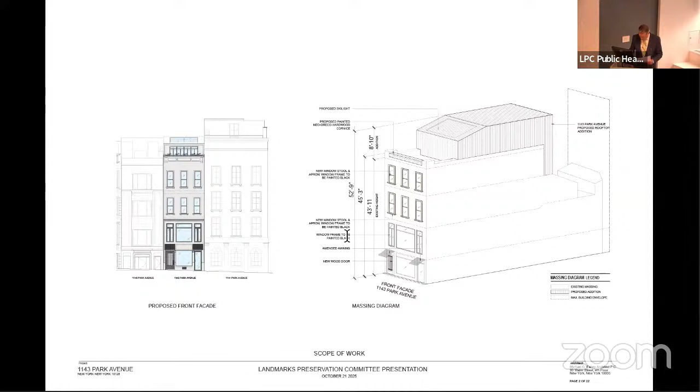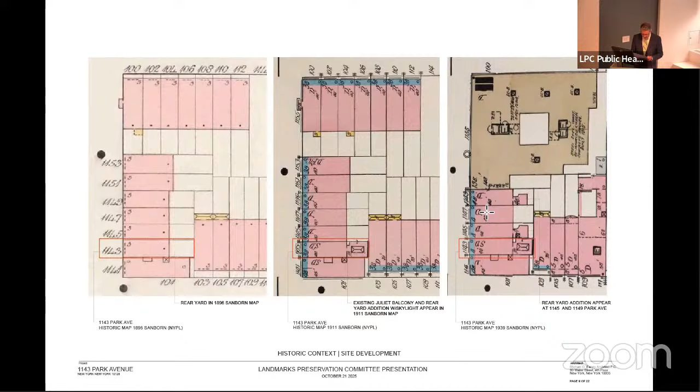In the center, the 1911 map shows that 1143 added a 2-story rear yard addition, occupying the total lot. In the 1939 Sanborn map, you can see that 1145 and 1149 both added 4-story additions onto the rear of their respective properties.

I'd like to talk a bit about the design of the project.

The addition and expansion of 1143 Park Avenue is a 517 square foot by 10-foot high rooftop addition. The addition is set back 16 feet off the front facade to decrease the visibility from Park Avenue in response to the comments from the Community Board 8 meeting.

The addition also has a shed roof with a skylight within the first 11 feet to decrease the exposure of the addition to Park Avenue.

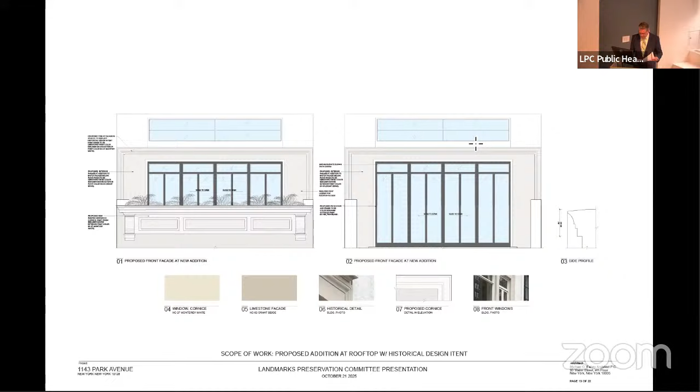In this slide, on the front elevation, we believe that the proposed design is aligned with the classical style shown in the original row houses, as well as you can see the new vertical extension here does not exceed the neighboring extensions in height.

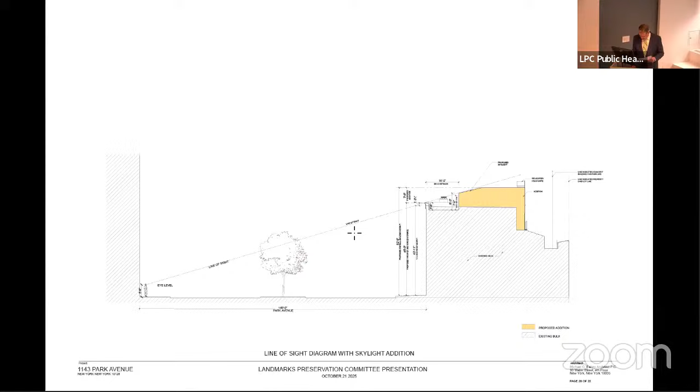Thank you for your time, and if there are any questions that anybody may have.

Thank you. Commissioners, does anybody have any questions? Commissioner Jefferson? Was the wood balcony original to the building?

No, it was not original. We believe it was added in 2004. Thank you. Any other questions?

Okay, so this item was read into the public hearing, public records. So we didn't have the opportunity to take testimony. So I'm going to note that there's nobody here that would like to testify.

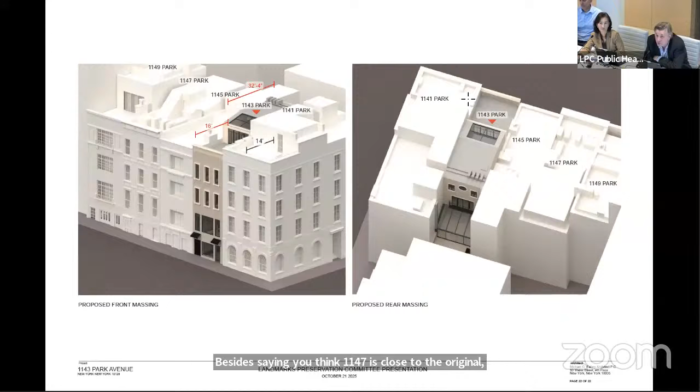Besides saying you think 1147 is close to the original, do you have any documentation of what the original building looked like? The only documentation we have is the pictures from the 1929 photo, as well as some documentation literature that I believe is on the Carnegie Hill Historic District website, saying that 1147 is the closest to the original design. Other than that, there's no other documentation that I have.

And this photo doesn't tell us what 1143 looked like. It just may be more accurate of 1147. Well, the 1143 - since there were 4 row houses, I suspect that Sullivan developed them all in the same style. And then 30 years later, Roth came around and he did 1149, he changed that facade, 1145, and then in 1924, 1143.

Thank you. Thank you so much. Okay, let's go ahead and close the proceedings. Commissioner Goldblum, would you make a motion to close the proceedings? So moved. Commissioner Jefferson, would you second that? So second. Okay, all in favor, say aye. Aye. Any opposed? Okay, the proceedings are closed.

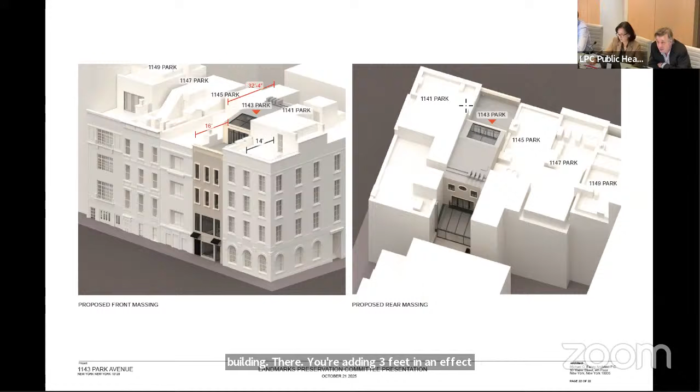So I think we should look at pulling that addition back 3 feet. You could potentially on the floor below add a 3-foot addition because we often accept that. I would also say that I think that round window is totally out of place.

And that rear facade can be worked on, but that is similar. So, in general, I think the rooftop addition from the front is fine with the added cornice, but I would leave the rest of the front as is. And I would reduce the rear addition, at least for the top floor, to keep the existing facade exposed. But again, we'll look forward to hearing what my fellow commissioners say.

And the other thing I'd add is I realize you made modifications after the community board, but it's hard for us to understand those modifications since I would have liked to have seen an appendix with the original drawings so I could understand what you did in response to what the community board said, because here you described it, which I appreciate, but it would be good to have it documented.

Thank you. Just wanted to note one thing before we continue the discussion. The property at 1149 Park Avenue, which is labeled on the diagrams here, the commission did recently approve a full height rear addition and rooftop addition on that property and had a very similar discussion based on the points that Commissioner Ginsburg just raised.

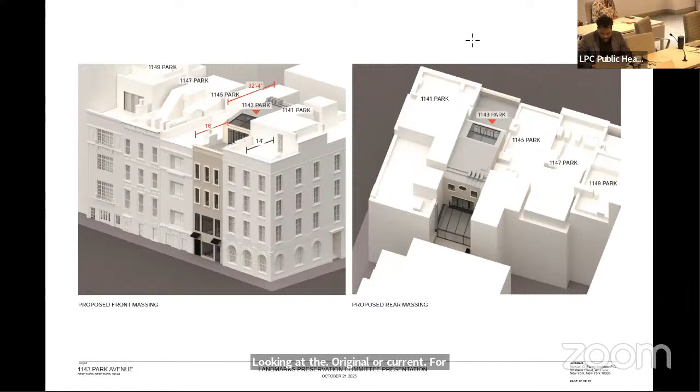Looking at the original or current facade, I can't say that I prefer the current design of the windows as opposed to what's being proposed with the window surround. In terms of the cornice and parapet, I think I like the extension or the increased height of the parapet, which also allows you to block the rooftop addition. However, I do kind of favor the original design of the cornice.

So I don't know if you could keep that original, or come up with some design that's a little more in scale with what's existing versus the newer cornice. And then in terms of the rear, I don't think I love the Oculus window. However, I do understand that it's not visible, so I won't make too much of a big deal about it. And because the other buildings also have the full height rooftop additions, then I don't have a problem with it as well. Yeah, so those are my comments.

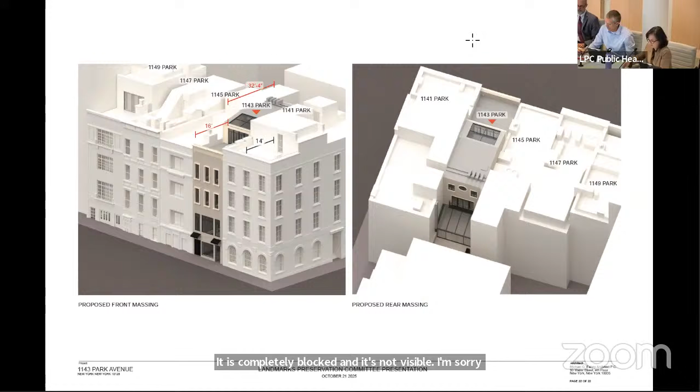It's not visible. I'm sorry, can I get some clarification on the front facade? Are you saying that you're okay with it as presented? I guess the inclusion of the window surrounds, I'm not so sure about that. Okay, you don't like the window surround? Yeah. Okay, and I guess the cornice itself, it should just be worked at to make sure its design is agreeable with what's already presented.

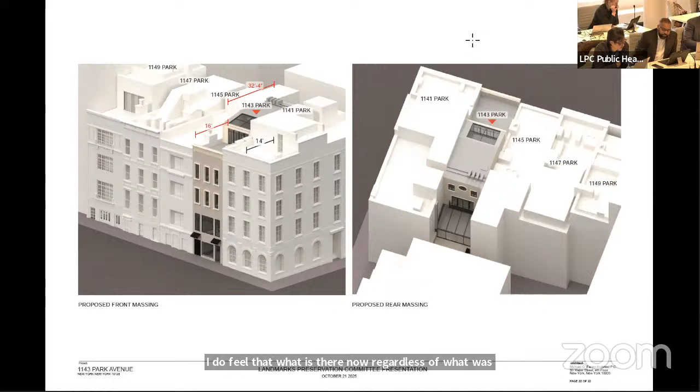In terms of the front facade, I do feel that what is there now, regardless of what was originally there, because of the great changes and renovation to the townhouses through time, what I see existing on this block is actually a very nice collection of townhouses that do have distinct styles, each one, and do represent different masses in terms of property width and height. It's a nice mix. So slight revision to the facade I am comfortable with, but I do feel that what's been proposed is a little too much change.

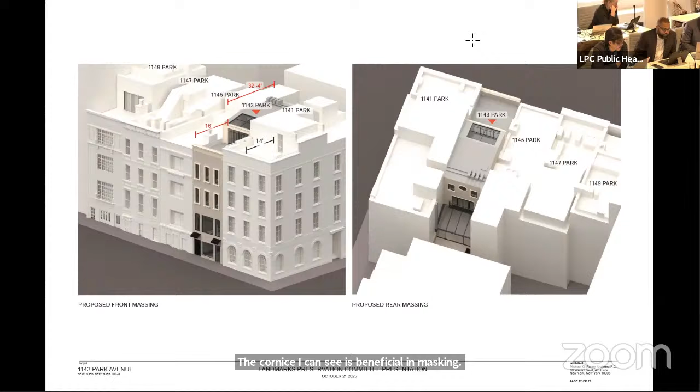I don't feel that the window surrounds are necessary. The character of the existing facade windows, I think, work well with the scale of the house. The cornice, I can see, is beneficial in masking the addition above. In terms of facade height, I think it's appropriate, but I do think that the style that's being proposed seems like a big departure from what's there. I would like the applicant to work with staff on better defining what that cornice facade elevation looks like. But in general, with the height, I feel that it is appropriate.

Thank you, Commissioner Jefferson. I must commend the architect because the thinking of the project was very clear as they proposed it.

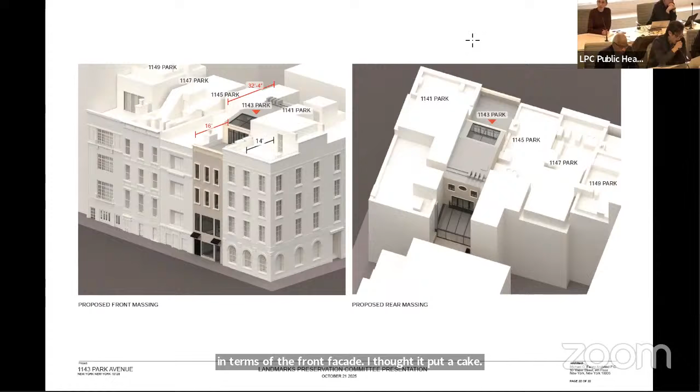In terms of the front facade, I thought it was okay. I thought I could approve it. I thought the cornice made sense to me, with the right proportion.

The rear facade, my concern was the original volume. I wanted to make sure that we kept the original volume, that was an issue. And at the end, I didn't quite understand. I would prefer to keep the original volume. And I do not mind the circular cutout in the back, but if we push it back, we can't have the circle.

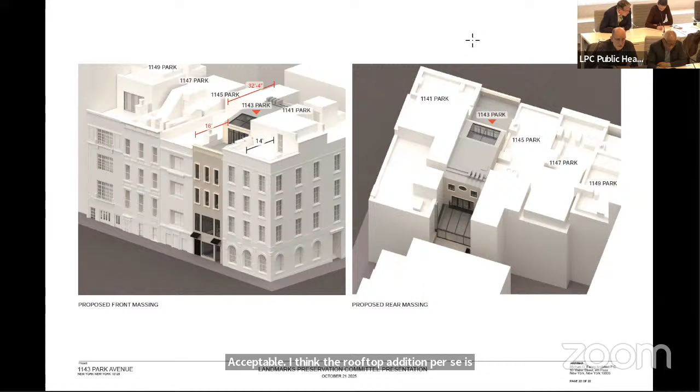But I do think that allowing for some modifications for hiding, raising the parapet, et cetera, are acceptable. I think the rooftop addition per se is acceptable. I agree with Mark's comments, though, that the reason I always oppose full height additions that subsume the entire volume of the building at the back is because I think one of our prerogatives here is to maintain the volume expression of the building. We obviously do that with the front facade and with the cornice at the front facade, and requiring a setback at the roof to distinguish any rooftop additions from the original volume.

That's the intention of the rear facade. That's the intention of the maintenance of the top floor of the rear facade as well, and the setting back 3 to 5 feet of any rooftop additions. I don't see a compelling reason here to vary that view. It's true that the context supports a full height rear yard addition, but I don't see that as the reason for opposing it, or the sole reason for opposing it. So I agree with Mark on that.

I do think that the round window is a bit peculiar, but we've allowed for much more peculiar things to go up in rear yards. I think it's one of those things where aesthetics versus historic appropriateness - I don't think it's historically inappropriate to have that weird window, but I might not have done it, that's a personal choice.

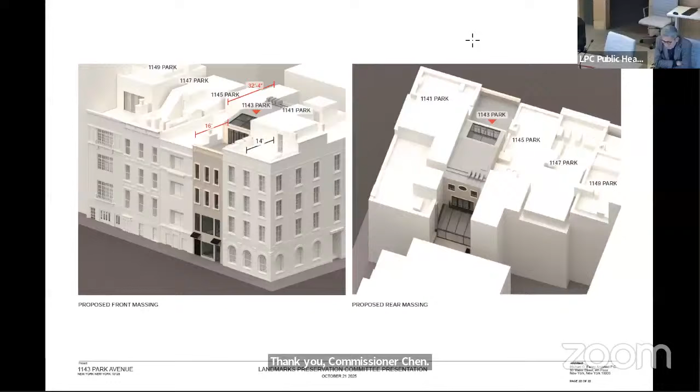Thank you, Commissioner Chen. I found that Commissioner Ginsberg's earlier comment was very revealing in the sense that this is what we often grapple with, given that the island's several hundred years of history, whether 200 years or whatever. At what point do you go back to that moment? I think this is a case here, whether Emery Roth or Sullivan.

I tend to agree with the commissioner's comment here that as much as possible, we should be conservative in this instance. No problem with raising the parapet height to sort of help the addition on the rooftop. I think the rooftop is set back sufficiently on the front.

And I agree with Commissioner Stephen Chu's comment about whether the cornice needs to work with the staff a bit about helping to modify. I think there's something that could be refined there. As to the back, since it's not visible, and I got delayed by the train by a few minutes, so I didn't get to hear that portion of the presentation.

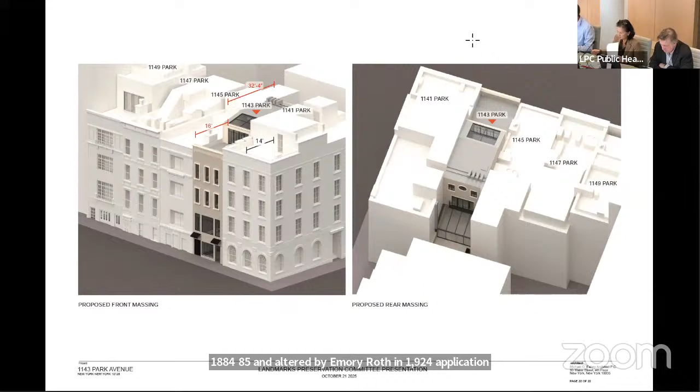Application is to modify the front facade, install cornice, and construct rooftop and rear yard addition.

I note that the building style, scale, materials, and details are among the features that contribute to the special architectural and historic character of the expanded Carnegie Hill Historic District. I also note that the Park Avenue facade was modernized with classically inspired elements in the early 20th century.

I recommend approval with modifications, finding that the proposed work will not damage or eliminate any significant architectural features, that the Park Avenue facade was altered over time, including the insertion of a two-story commercial storefront, the removal of ornament at the upper floors, therefore raised parapet, and replacing the existing cornice with a taller painted wood cornice with a different design will be in keeping with the history of the change of this facade.

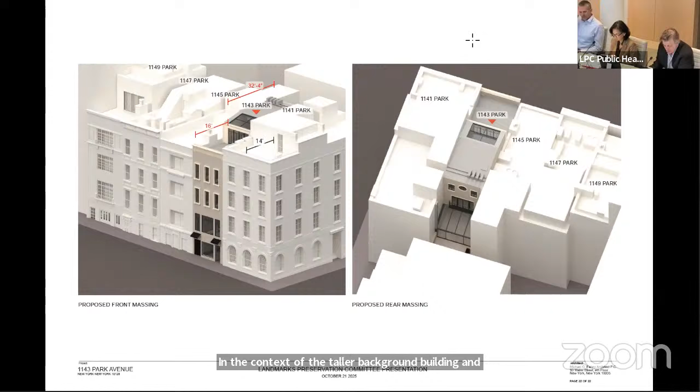That the proposed rooftop addition will only be minimally visible over the raised cornice from Park Avenue in the context of the taller background building and other rooftop accretions, that the simple massing and off-white stucco cladding of the street facade portion of the rooftop addition will be consistent with alterations

and additions historically found at buildings of this type, style, and age, that the work of the rear of the building will not be visible from any public thoroughfare, that the building is separated from the row by an existing full-height L to the north and is next to a deeper corner building to the south. Therefore, the demolition of the rear facade and construction of a full-height rear addition will not diminish its relationship to the other buildings in a row.

That the existing rear yard addition extends to the rear lot line. Therefore, the proposed addition will not further diminish the block's central green space. That the design and materiality of the rear yard addition, featuring stucco cladding, single light windows and doors, and metal railing, will be in keeping with the residential scale and character of other buildings in the block.

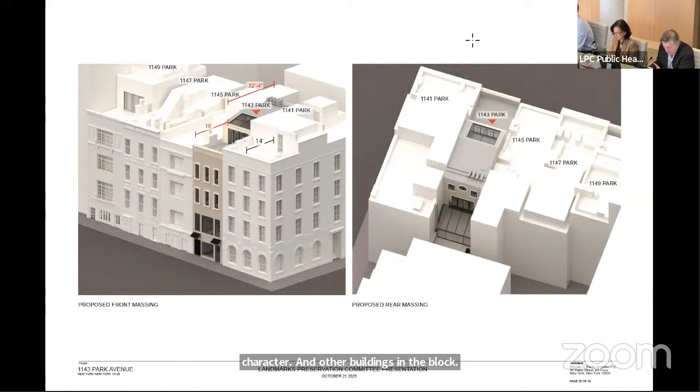However, I find that the addition of window bracket sills and the neo-Greek inspired design of the proposed cornice does not relate well to the classical style elements of this restrained facade, and the result is an awkward mix of styles on the facade, and that on the rear facade, the oculus window is out of place.

Therefore, I recommend, working with staff, that the sills and brackets be removed, that the design of the new cornice with existing classical features be studied and refined in consultation with staff, and that the oculus window be replaced by a more traditional window.

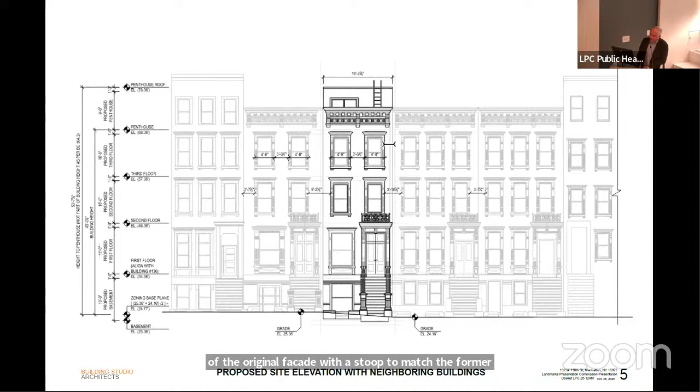We are proposing a 2-family reconstruction in the spirit of the original facade, with a stoop to match the former twin to the left, and detailing consistent with the row. In section, there is a penthouse set back and not visible from the street, concealed with a cornice that acts as a parapet for the roof terrace. The existing street front with a rendered elevation of our proposal: this will be a 3-coat stucco over CMU facade with black 2/2 aluminum clad Pella traditional windows.

Views from the west show our facade with 2 windows, and views from the east show our facade again with 2 windows, and the neighboring facades with the tripartite configuration. At the rear of the property, the block is primarily residential. The building is comparable in height with its context and its neighbors. Looking closely at the massing in the rear, there are a number of the original two-story tail additions. We are aligning our rear wall of the building with the neighboring row, and extending the lower 2 stories out to match the tails of the adjacent buildings.

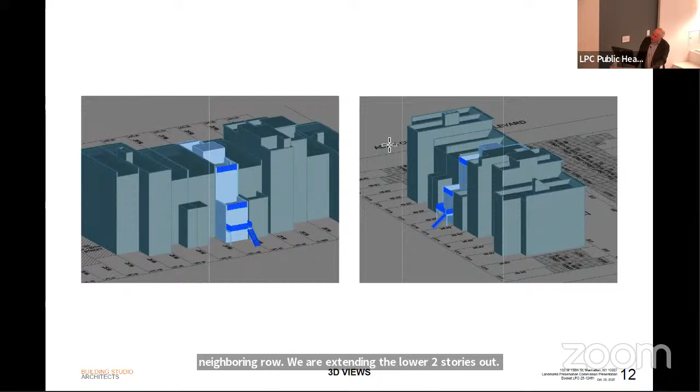Zooming in further, you see the alignments. Another section showing the penthouse setback concealed by the parapet. At the rear, a mock-up rendering of our alignments. The rear facade of the building is brick, with open iron railing. The windows and window door fenestration at the terrace match the neighbors. Our materials: stucco, black clad windows, black painted metal, and matching ornamentation. I'm going to pause here - there's an appendix with detailing at great length for the details of the building proposed.

Are there any questions? Great. Thank you for keeping it short.

Commissioners, do we have any questions? Okay, go ahead, Commissioner Chu. Sorry if I missed this, but is it essentially a reproduction of what was there?

It is essentially a reproduction of what was there, save one difference: the building to the left, which is its twin, has an altered first floor window. That's not original detail - the original detail is from our buildings to the right, which is what we're using, and that's something we worked on with staff. The one on the left has been altered - the surrounds, the two side elements, were widened quite a bit. I can see the original condition on the left. So what's being proposed is actually the accurate condition. This rendering is corrected; the earlier renderings show a wider surround because we weren't able to correct them. Thank you.

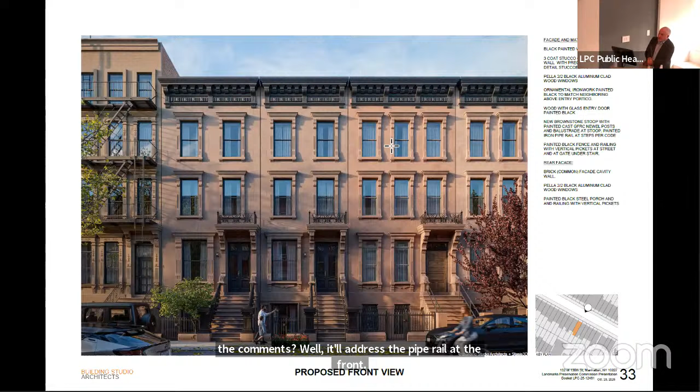Thank you. Would the applicant like to respond to any of the comments? Well, it'll address the pipe rail at the front - that's something else we've worked on with staff. We are proposing a reproduction cast railing, which is very massive, very heavy visually, and also very low. Inside of that, we are proposing a pipe rail to meet code safety standards. That pipe rail is very minimal visually in relation to the cast railing.

Thank you. Commissioners, do we have any final questions? Commissioner Chu? Is that revision not represented here? It's different, it may not be represented well here. I don't believe we have it in our oblique rendering, sorry. On the wrong way - yeah, oh, you passed it.

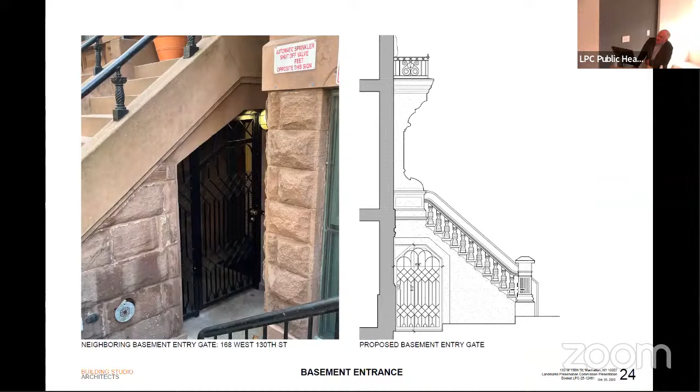So our railing is inside of what is basically a foot lower cast. John, you just want to describe it? So you're restoring the historic heavy balustrade with the cast material, and then these are secondary handrails, thin pipes that are set inside on the steps, and I think that is what you see. And the objection is to that thin pipe rail that is inside, which is code height.

Right, we had looked at actually doing that on top of the cast rail, but it did more harm than good. It intersected with the building awkwardly, it intersected with that newel post awkwardly. So it just - raising that casting and everything just doesn't work with the neighboring one, which is original.

And the supports for the handrail are bottom and top only, or do they support mount for the bracket? Handrail are bottom and top only. Okay, so they don't attach to the cast iron? Correct. Okay, thank you, okay thank you.

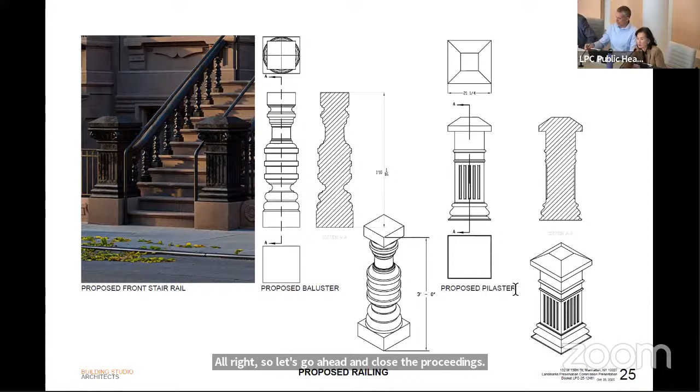Sure. I guess first of all, I truly appreciate the want to sustain the quality of the neighborhood itself. I know there are times where there's many things you may want to do, but this seems to be a very responsible response to the infilling of this block.

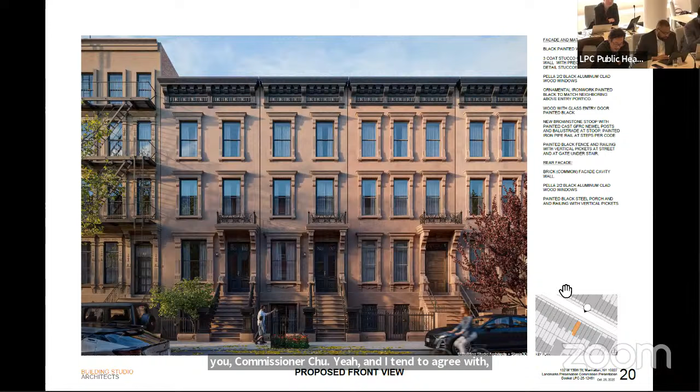Yeah, and I tend to agree with Mark's comment here in general. When I see this proposal, the questions that come to mind are precedent versus evolution. These are discussions that we've had in the past. Generally, I would prefer something that was designed to be compatible with the historic context rather than an outright reproduction. It wasn't built 100 years ago, it was built today. However, I think this is one proposal option that I do think is appropriate. In fact, this piece was demolished only 4 or 5 years ago, pretty recently, and we know exactly what was there. But to that point, I do think that this discussion we seem to have had about the handrail, my thought is it can be revised so that it doesn't feel like it was the historic piece and then a new handrail was placed on it. To me, that starts to get a little odd. It's a new building, it has a new handrail. Yes, it desires to be in keeping with the historic context and the original fabric, but it is not historic. Therefore, I do think it can be simplified without the style intention of being the historic style.

Thank you. Commissioner Kumbay, would you like to read the motion, adding that they should work with staff on the details of the pipe railing to come up with a solution? Yes. Thank you.

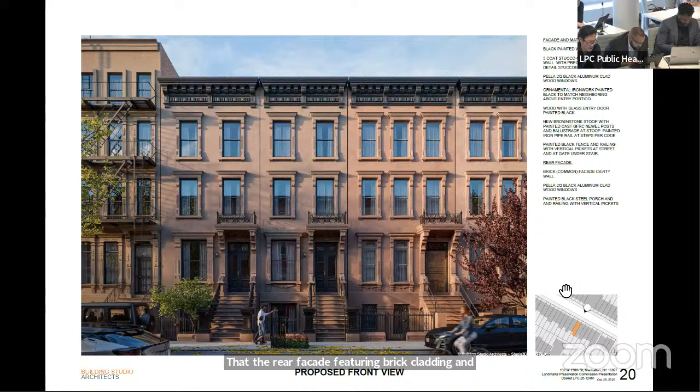That the rear facade featuring brick cladding and regular punch window openings will align with rear facades of the 2 adjacent buildings and restore a unified rear cornice line with the row. That the proposed rooftop bulkhead and rear yard addition will not be visible from any public thoroughfare.

That the proposed 2-story extension will align with the rear addition at the adjacent building and will be consistent in height and depth with other rear additions within the row and will not diminish the block's central green space.

We also note that the handrail as presented should be looked at again with staff to potentially find another solution.

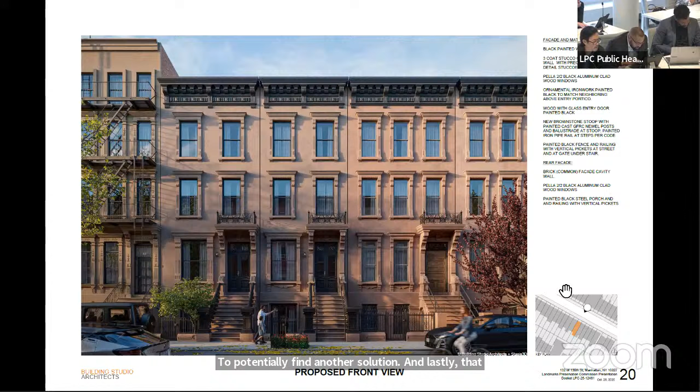And lastly, that the new building enhance the special historic and architectural character of the streetscape of Central Harlem, West 130, 132nd Street Historic District.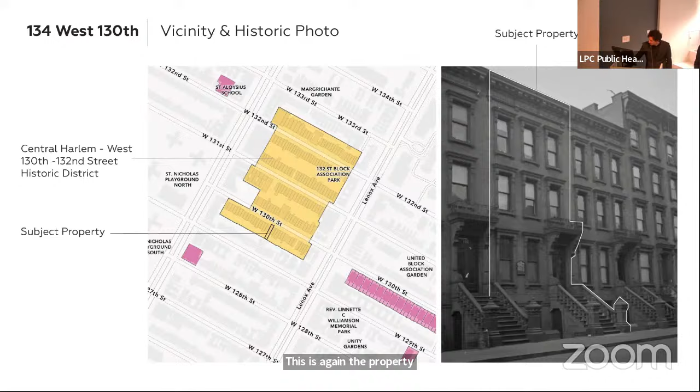A photo of current conditions, showing the vacant lot to the east here. There's no work proposed on the front face as part of this project. The work is only in the rear.

This is the existing 2-story bulk in the back of the building. The footprint is basically an L, a rectangle with a smaller rectangle in it. This was a 2-story brick building where the bulk was, and the building is 4 stories. So what we're proposing is to take that 2-story addition and do 2 stories above that. But we'll still be less tall than the majority of the building. We're not going above the main building, we want to go up to it. In fact, we want to be a little bit below it. You'll see that in future slides.

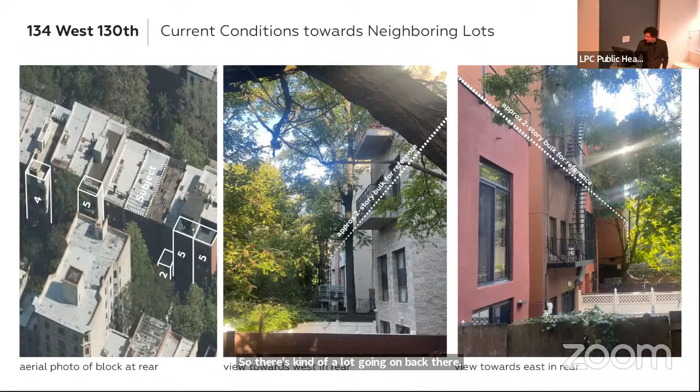Additional photos from the aerial, just to give you as much perspective as possible. The parcel directly to the south of us, I believe, is 6 stories, and that's an extra wide lot. So that kind of towers behind us. And there are non-historic buildings - since we're at the border, there's non-historic buildings going taller on different sides, as you see on the right photo. And you see the neighbors on the far corner.

Okay, so to get into the design: basically 2 stories on top of a brick base. These will be restrooms, and those restrooms will have 2 windows. Those windows align vertically, and they align on the east side of the building. The moves on the work on the brick base are relatively modest, just to make it more workable for us. It's to switch the swing door to a window, and we're going to move the access into the garden down into the cellar. The new portion obviously is up above there, and I'll get into materials on the next slide.

This is the south elevation, existing on the left, proposed on the right. You can see the 2-story addition above. We're very proud of the fact that the 2-story addition actually steps back slightly from the brick base to a more slender metal top. We're not trying to emulate history, we're trying to respect it and acknowledge the fact that this is built in today's current construction methods and standards, but we're trying to do that in a sensitive way. There are no windows on the south face - that's actually intentional to respect the fact that there are no windows below it. That allows us a symmetrical facade. We're going to run a gutter and a downspout right down the center to play up that symmetry a little bit more, and again, that metal is going to step a little bit.

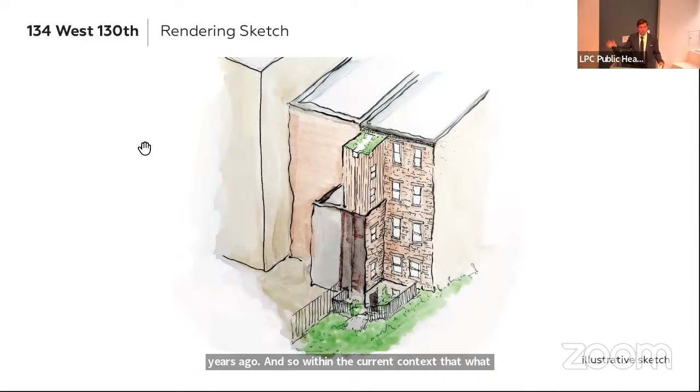We're obviously very excited to bring new life to this historic building that's been vacant for a quarter century. I think the choice of material is really what's at the heart of the discussion here. We've been working with LPC staff on this project since February of this year. We've had a lot of back and forth in terms of ideas. We believe that the current proposal both reflects the historical aspects of the district and doesn't want to pretend like this was built 100 years ago. So within the current context of what we're trying to build, we feel that it fits the character of both this brownstone and the general neighborhood as a whole. Thank you for your time today.

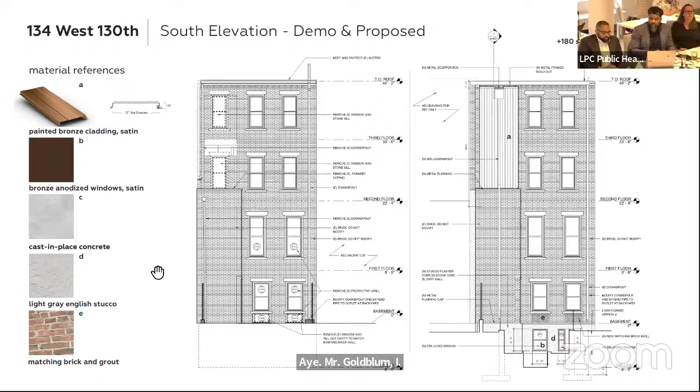Second. Thank you. Mark, will you call the vote? Vice Chair Master, Aye. Commissioner Chen, Aye. Commissioner Chu, Aye. Commissioner Ginsburg, Aye. Commissioner Goldblum, Aye. Commissioner Quimby, Aye. Commissioner Jefferson, Nay. Commissioner Mann, Aye. Commissioner Wilder, Aye. With 8 in favor and 1 opposed, the motion passes.

Thank you, that's been approved. Please continue to work with staff. Thank you. And now we're going to move to our public hearing agenda.

We'll start with public hearing item number 1, LPC 26-00971, an application for a certificate of appropriateness in the Borough of Brooklyn, Block 248, Lot 9, 77 Remsen Street in the Brooklyn Heights Historic District. This is an Anglo-Italianate style house built in 1857. The application is to install a cornice, modify the rear roof line, construct a rooftop bulkhead, remove a bay window, and construct a rear yard addition.

Good morning, my name is Ilya Vilnitz. I'm the architect for the project. This is 77 Remsen Street, located in the Brooklyn Heights Historic District on the north side of Remsen Street.

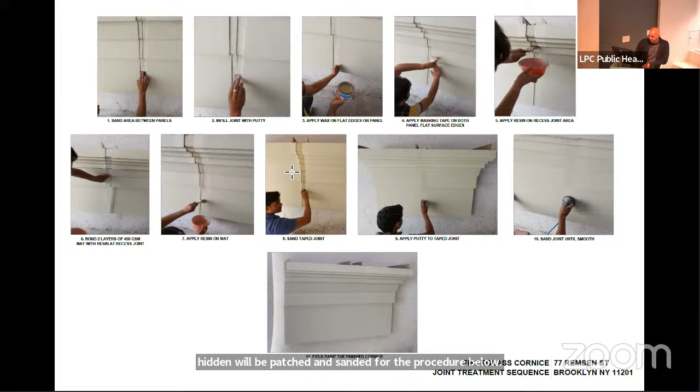This building does not have a cellar floor as conventional townhouses have, so things like meters, storage, laundry, pumps, hot water heaters, and sprinkler backflow prevention devices cannot be located below grade. Therefore, they have to shift above grade, and this puts pressure on the necessary programmatic elements for this house. Therefore, we're also requesting a 2-story and cellar horizontal extension for the building.

We originally proposed a much more modern version for the rear facade elevation, but we've collected feedback from the community board, from our neighbors, from the Brooklyn Heights Association, and we've revised our design significantly for a more contextual approach where we're recreating the existing historic bay window.

The proposed extension is 10 feet to the face of the masonry and an additional 2'4" projection of the bay window. The original extension we proposed originally was 12 feet. So we've also set back our extension per the comments of the neighbors and the community board.

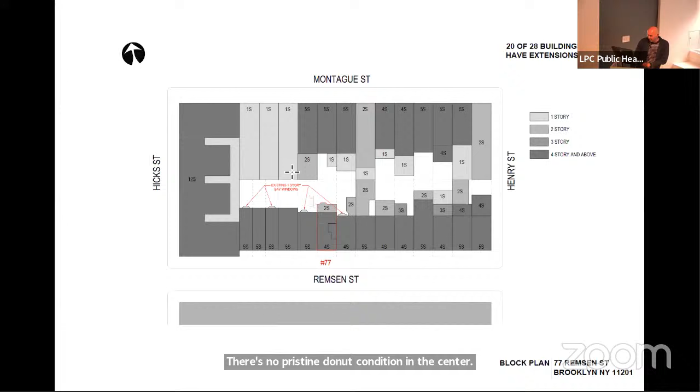This is the block plan for the building. As you can see, it's substantially built up. There's no pristine donut condition in the center, and approximately 71% of the buildings on this block have an extension. Again, you could see to our right, our neighbor at 79 Remsen has a two-story extension that's deeper than what we're proposing at 10 feet.

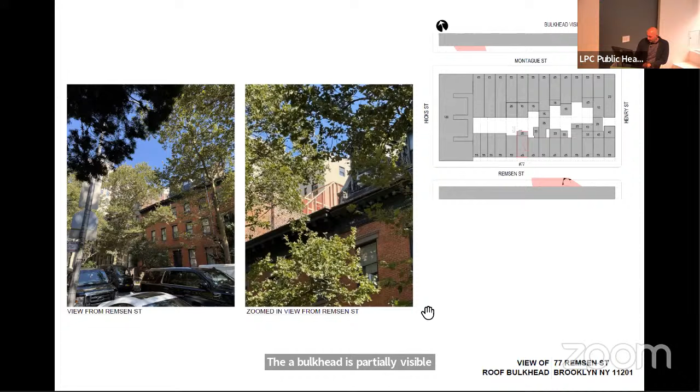The bulkhead is partially visible from Remsen Street as shown in the red sliver. So here are photos from Remsen Street. You can see the bulkhead partially visible, and as you move west, you see slightly less of the bulkhead on Remsen Street.

It's also partially visible from Montague Street over the existing one-story commercial building, but there have been two other bulkheads that have been recently approved that are more visible than what we're proposing from that same vantage point.

Here's a slide that just shows the summary of our project. You can see the two-story extension in the back with the bay window, as well as the one-story stair and elevator bulkhead at the top of the building, with the portion over the stair sloped to minimize visibility. Thank you.

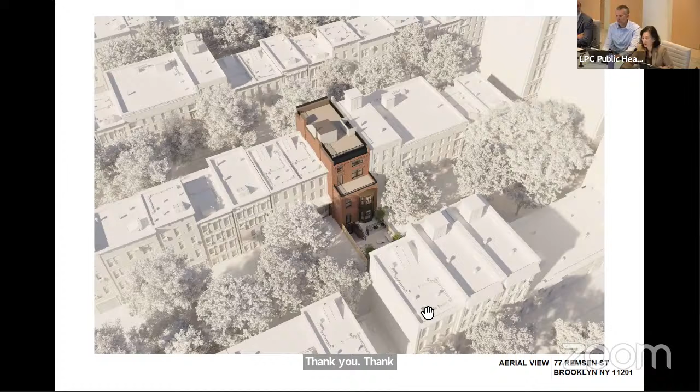Sorry, I may have missed this, but is that bay window original and historic to the house?

From our probes, it seems so, yeah. It's definitely a historic bay window. I'm not sure the actual original construction date could be entirely known. It seems to be unlike the other bays, which are one story on the houses nearby, but certainly it has historic detailing and materiality, and there was some consistency of that on the block that was mentioned. There were other bay windows, but I'm not sure that there are any other double height bays.

Okay, so it's like a lot of row house blocks in Brooklyn where you do see oriel windows.

Sometimes they're very repetitive and many houses have the exact same one. Other times there's kind of a mixture, which suggests they came in at different times.

Okay, thank you. Commissioner Jefferson, then Commissioner Wilder. Sure, if you go to the front facade...

So the existing building had circular lintels on the top floor, and you're pretty much replicating it on the right-hand side, but you didn't change the lintels on the top floor. Why not? The existing building's lintels at the very top floor, the extension added in the 50s, have a square lintel, and we're maintaining that same square lintel. So the existing lintels at the top floor are square. But the historic has rounded.

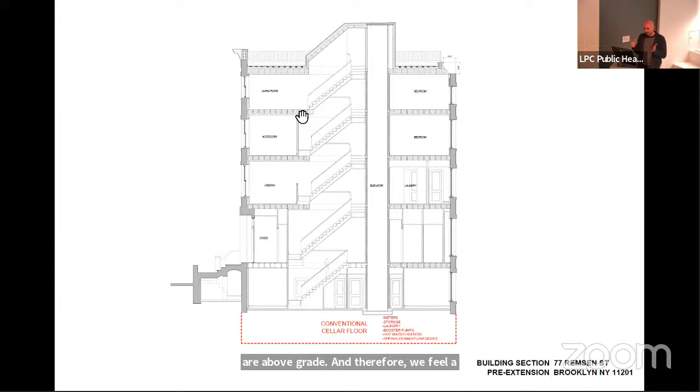Regarding the excavation, which is not really a public hearing item, I'll just reinforce the reason why we're going for this extension: this building is missing a whole floor. Typically, buildings of this type have an entire floor that's completely underground. We don't have that floor. So all of that back-of-house space that lives in that floor below grade now has to go above grade, and that puts pressure on all the elements above grade. Therefore we feel a small 10-foot extension is justified in this condition.

When you consider the fact that the block is significantly built up, and by code we're allowed to go higher and deeper, we purposefully proposed a moderate extension here to not infuriate the neighbors. We want to be good neighbors, and it's a shame that we're put in this position to have this discussion at odds. We really don't want this, but we really try to be respectful of the neighbors, of the neighborhood.

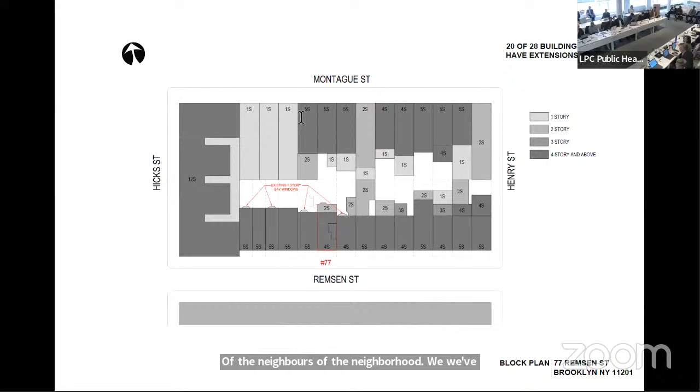We've significantly altered our rear facade design. I don't know if any of you saw the previous design—it was much more modern, and we listened to comments about it not being contextual. People are looking for precedent, and there's no better precedent than the existing condition, which we're replicating because of the comments we heard when we originally made this presentation. So we shortened our extension as well on the second round. We really tried to be accommodating to all of these same comments you've just heard.

We feel that our proposal is contextual and within the guidelines of Department of Buildings and Landmarks. In terms of the Department of Buildings, we've cleared all our objections there—our only remaining objection is to provide landmarks approval. So they have no issue with what's going on. Everything is completely above board. This cellar-basement calculation is a letter-of-the-law calculation. There is no moral ambiguity about it.

And maybe the homeowner and Michael would like to also give a response.

Michael Devonshire from JHPA. We are the preservation consultants for this project. I have 45 years of experience in historic preservation, and we were hired by this client with the goal to make sure that this was appropriate from a preservation standpoint.

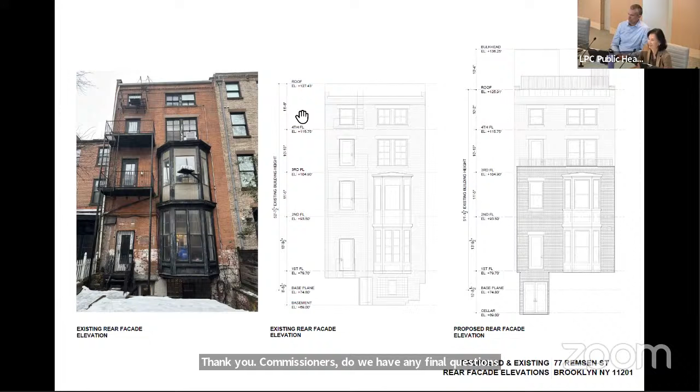Actually, before that, could I just make a note? There's been a lot of testimony about light and air and water runoff, and while those are all very important issues, the LPC is an agency of very limited jurisdiction, so those matters are not before us. As the applicant explained, this project must be reviewed for zoning and building code issues by the Department of Buildings.

Okay, so we have a couple of questions from commissioners. We're going to start with Commissioner Wilder. Quick question - trying to understand the rear yard context a little better. The sheet or drawing on page 24 shows a perspective of the site plan, and it's a little different than the actual site plan showing the rear yard extensions.

Sorry, I don't have the sheet numbers here in front of me. Is it towards the rear, your rendering of the rear yard? Is it the axonometric block plan? Yeah, this one. Yeah, it's difficult to understand which buildings do have the rear yard extensions from here. So this aerial view - the renderer could not model the entire block of Brooklyn, this block.

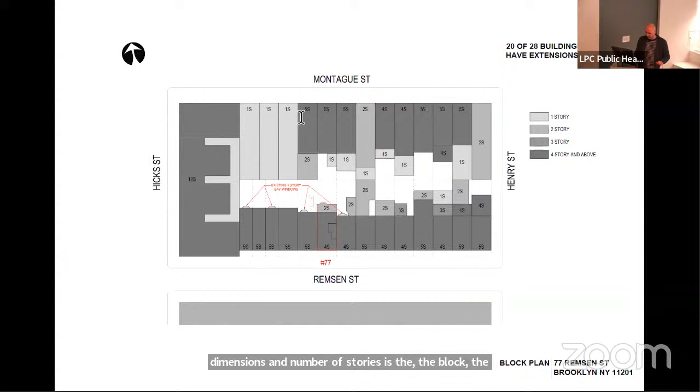So this is really just a summary of our project in the context of the neighboring building heights. The block plan that is most accurate in terms of dimensions and number of stories is the block plan that we illustrated here, which shows the extensions and the existing conditions of the buildings.

Thank you. Commissioners, who else had questions? Commissioner Chu? Yeah, just to be clear, and there was a lot of comment about this, and you confirmed the accuracy of this plan - what does two mean in your mind? Two stories. A story is defined in the building code as a basement, 1, 2, 3 - it's anything that's considered a story.

So what's not a story is a cellar. A cellar is a space that's more than 50% below grade. So we're proposing a 2-story and cellar extension. Therefore, the 2-story portion counts as the 2 story, and the cellar is not a story in the eyes of the DOB and building code. The properties to the right on this plan say 2S.

If those are classified as basements, then in height, they are a basement and one floor above grade, correct? Is that where the distinction lies here? The building directly to the right of us does have a basement. So one of the stories labeled here is a basement floor, correct?

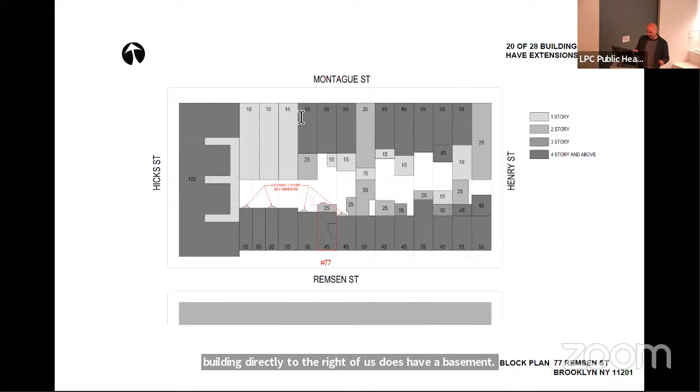Just as a point, I think it would be much more useful for us to see an actual massing of this than a labeling, because it doesn't tell us heights. It's more about definition of floors than it is about mass, which is what we're trying to understand here.

My other question is, if you can go to a slide that compares the existing to the proposed in rear elevation. So I am also a bit confused about the discussion. I understand the difference of basement and cellar designation, but here it does say cellar from basement, and the elevation is the same, but there's 2 feet added in the string. So I'm confused too. It says cellar plus 69 in both, but there's 2 feet gained somehow.

I'm sorry, Commissioner, that is a typo. I apologize for that. There is a 2-foot difference between the 2 elevations. So I believe on the right, it should say 67 feet approximately.

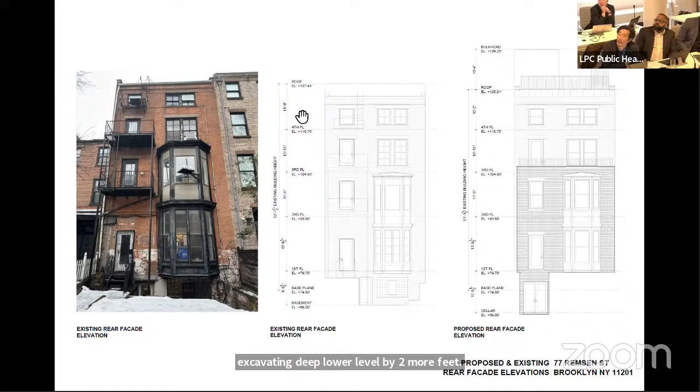Okay, so in fact, what is the scope is that you're excavating the lower level by 2 more feet throughout. Is that correct? That's correct. And is that done by stepping away from the existing foundation, or are you proposing to shore these walls up? We have an independent wall on one side, which we're going to be underpinning, and we have a party wall on the opposite side, which we're working to with the neighbors for an agreement to either underpin that wall, or if not successful, we will have an alternate foundation solution.

Okay, now I understand the situation. Thank you. Okay, Commissioner Jefferson and Commissioner Ginsburg.

You're trying to be very rigorous. So the question of the bulkhead is visible, and the height of it is 9 feet 7 inches, I think it is. Can you reduce that to 8 feet?

The interior dimension? It's mostly driven by the overrun of the elevator that we're proposing. Ah, okay, so you can see it's reduced as much as possible at the elevator portion. Thank you.

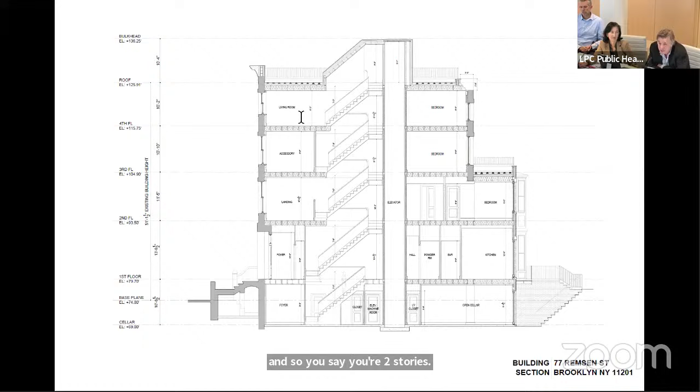This may be as much for staff as the future. I realize that it may not be easy to get the elevations, the height in feet of all the adjacent buildings, although that might be possible and would be helpful. But for future reference, often when you have a basement and a one-story addition, it will indicate B plus 1 story instead of 2 stories. You were technically correct that the building department considers it 2 stories, but given that you're now making your basement a cellar, and so you say you're 2 stories, that is different than the adjacent. And although technically what was shown here is accurate in terms of how it is defined in the building department, for our review, it is somewhat misleading.

Commissioners, any other questions? Okay, so let's go ahead and close the hearing.

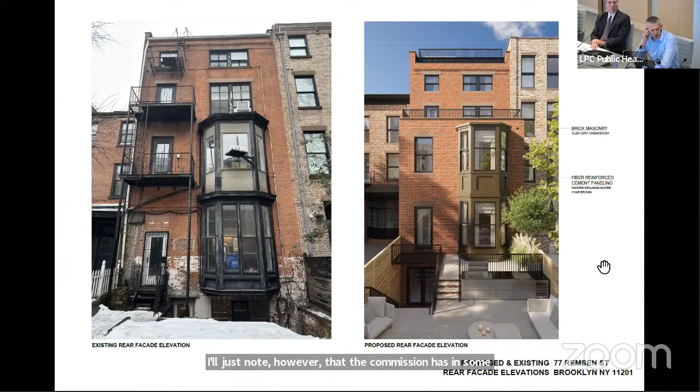I'll just note, however, that the commission has, in some cases, approved removing the bay window, sometimes salvaging it if possible, sometimes replicating it or something close to it, as part of an application that also seeks a rear yard addition. So that is something that's been reviewed and approved in the past. I'm not saying that happens every time, but it's certainly something that's been done before.

And because they want to maintain the sort of, as was stated, visage of the feature, it has found that to be appropriate to sort of relocate it and reinstate it. And then the other thing I'll just say about rear additions, I agree.

I think the materials submitted are lacking in some cases. It would have been nice to have a 3D aerial shot, which you can get pretty easily from Google Maps and swirl around to see a little better. But ultimately the number of stories is less important than the bulk, the massing itself, its depth and height, and how that compares to the surrounding massing of additions on a particular block. I think some of that's missing for you all to see.

A few houses down at 85 Remsen, the commission did approve a one-story addition on top of the existing L, making it a story taller than the other Ls that exist in that group to the left of this house. So just to paint that picture, some height has been added in this particular group of buildings before, and some of the other Ls in this group are deeper than what's being proposed here. Just filling in some blanks that we can't necessarily see due to the limited views provided.

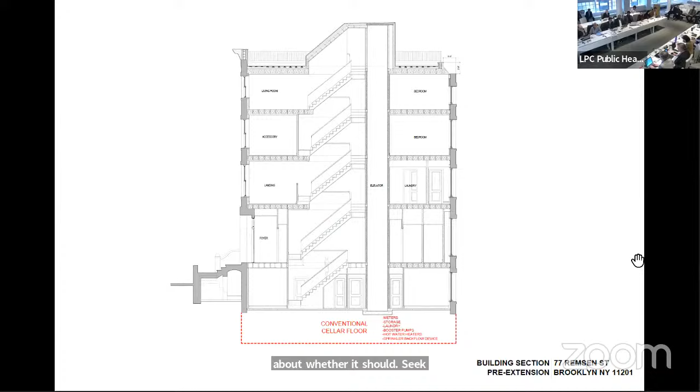There was some discussion about whether the cornice should seek to replicate the 1940s cornice, which showed one story less, and segmental arches over the top floor windows, which are still there of course. I don't think that's necessary here. The facade has been modified and they're not proposing to return it to its original proportions. I think the cornice is not seeking to emulate a specific historic model, but is generally trying to be consistent with the aesthetics of the blended facade that it is the top of, and I think that's an appropriate way to go about it.

This is a very varied streetscape with lots of individual buildings of different heights and conditions. I think this cornice would not be out of place, nor would the volume of the building be out of place, nor do I think the shape of the window headers as currently configured is an inappropriate modification. So I think it can be done as it is.

Thank you, Commissioner Chen? Oh wait, Commissioner Chen's not here. Commissioner Mahan?

Sure. I'd like to begin by expressing my appreciation for all of the public testimony. That's a really important part of this process. So I'm thankful that we had all of that today.

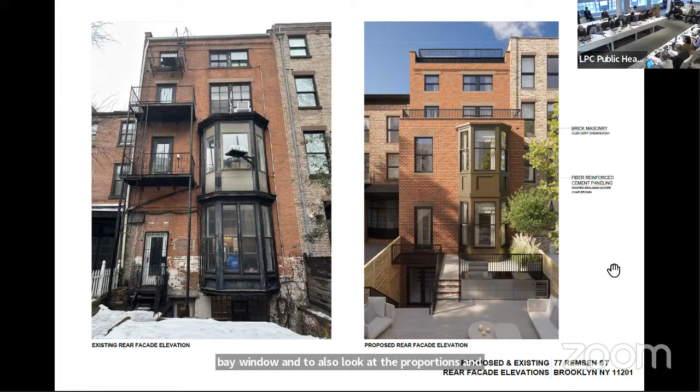However, I recommend that the applicant work with staff to refine the details and materiality of the bay window, and to also look at the proportions and details of the parapet above the bay window at the roof of the addition. Thank you. Commissioner Mayen, would you second that motion?

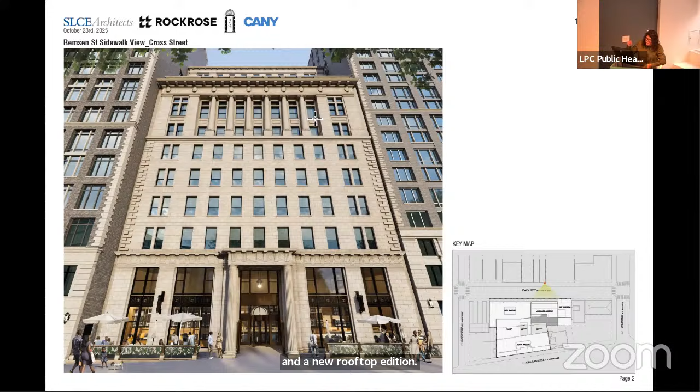You may recall that in summer 2024, we presented a proposal to adaptively reuse 176 Remsen Street, the former Brooklyn Union Gas Company building, an individual landmark. This project included restoring the central infill, creating new retail storefront entrances at the base, and a new rooftop addition. This is part of a larger residential development that you'll see in the plans throughout the presentation, with new buildings to either side of the building.

Today we will be presenting scope for window replacement. Because the building is being converted into apartment units, code requires ADA compliant windows so that any individual living in the apartments can operate them. The existing windows at the front facade are 1/1 kalamein windows, which we'll look at more closely.

We'll be proposing new aluminum windows to match the historic as closely as possible. That will have a fixed top sash and an in-swing casement bottom sash. Also before your review, at this non-visible secondary elevation, there's a large monumental window that is a special window per LPC rules that will also be replaced with a new aluminum window to match historic.

So the building was constructed in 1914, designed by Frank Freeman. As I mentioned, it was originally the headquarters of the Brooklyn Union Gas Company. It was converted into an academic building by St. Francis in 1962, and its new life will be converted into a residential building.

The existing windows are original. They are kalamein, which means it's a sheet metal over a wood frame. This particular metal is a brass alloy. As you can see, they're 1/1. The windows were measured and studied so that new custom windows could be created for this window replacement project.

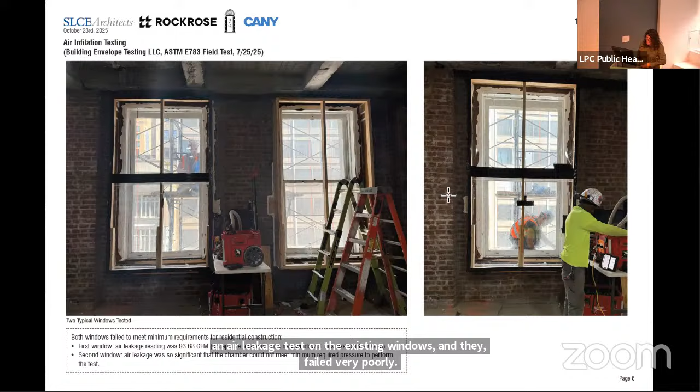As part of our investigation for background, we also did an air leakage test on the existing windows, and they failed very badly. One was so bad that it could not even meet the minimum required pressure to perform the test.

Also, as background, we looked at how Landmarks has reviewed similar projects. One example is recent from 2024 at 95 Madison Avenue. This one is also an individual landmark, also had original kalamein windows, and was also being converted from a commercial building to a residential building. In the findings, Landmarks noted that the new windows would serve the adaptive reuse of the building, and would only be perceptible in difference when the bottom sash was in operation, because the bottom sash would be a casement, and otherwise was appropriate.

Jablonski Building Conservation was involved in investigative analysis of the windows, both in the metallurgy aspect and in finish. The historic finish was a pre-patinated reddish brown color, which you see in the center here. The left-hand side is corrosion that has happened over time, and the right is the brass alloy in its bright finish. So the goal is to match the historic finish as closely as possible.

We're still working on that. We have a sample of what the finish looks like on the aluminum, which will be the window material, but we're still working on getting this exactly right, though I think we're quite close.

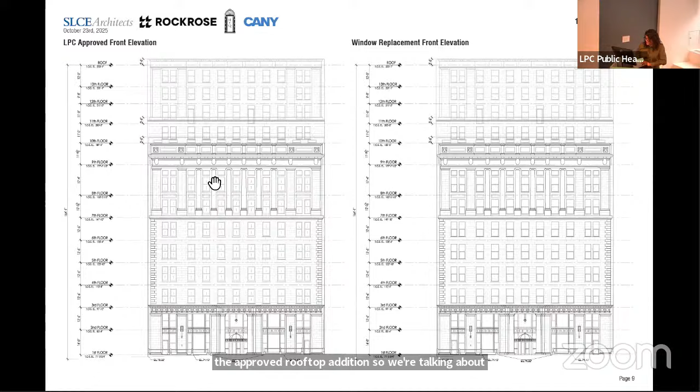So here we have the approved and proposed overall elevation. The historic building ends here, and what's above is the approved rooftop addition. So we're talking about the windows from the 3rd floor to the top. These are detail elevations showing the double hung operation changing to a fixed top sash and an in-swing casement bottom sash.

And then we have details. I won't go into the exact dimensional changes, but I'll just note that they are as minimal as possible to accommodate both the operation change and also having insulated glazing. We've worked very hard on getting these details as close as possible.

So the existing is on the left, the proposed is on the right. You see the top fixed sash is in the same plane as the double hung top sash, and the bottom is set back so that it has the offset as if it were a double hung window, but we'll have an in-swing operation at the bottom.

Here we have two horizontal sections of the proposed design, showing the difference between the fixed jamb and the casement jamb. New brick molds will be provided to match the existing brick molds.

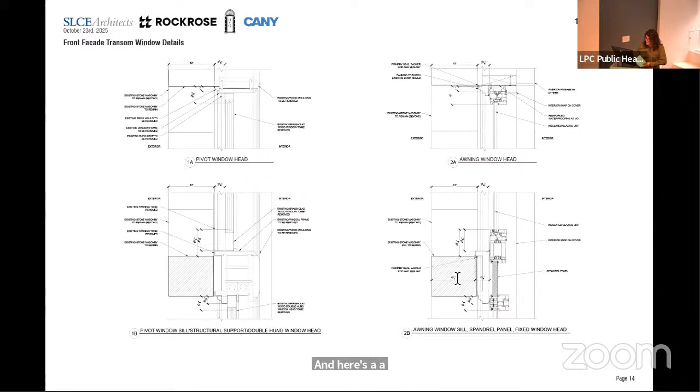So this just shows the pivot transom sash going to an awning sash in the proposal. Here's a vertical section detail. This is that limestone beam floating in front, the metal panel behind, and the 1/1 sash below will have the same detailing as the previous details we looked at before.

Going to the back of the building, this special window monumental assembly is also the brass alloy Kalamein window, so sheet metal wrapped over wood. All of these arched windows were the same configuration but had been replaced over time. We will be installing new windows to better match historic at these other window openings.

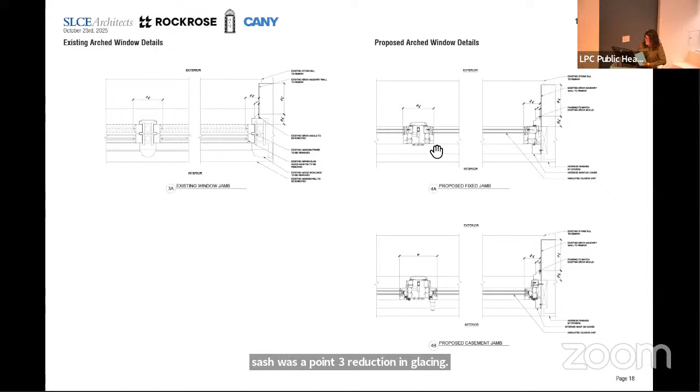Here we have the details showing the transom bar profiling being matched for the proposed, with the details being very similar. For the glazing calculations, this one has a 1.6 decrease in glazing area, and then the main 1/1 is a 0.1 reduction in glazing, and the transom sash was a 0.3 reduction in glazing, so very close to the historic area of glazing. This is a horizontal section showing the transom area and how that transom will be divided at the top of the monumental window.

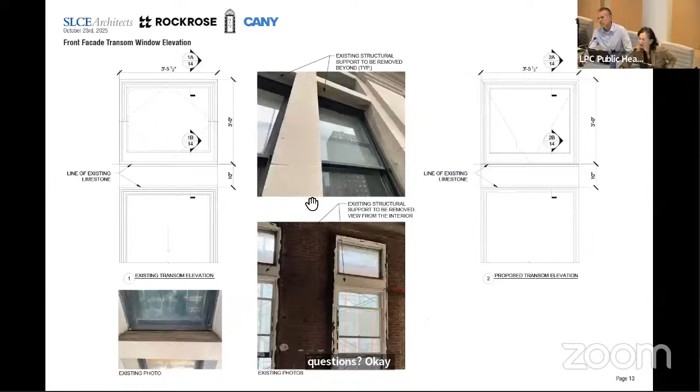Did you want to respond to the comments? Just to reiterate, we feel this is a modest change to allow for the adaptive reuse of this building. Okay, thank you so much.

Commissioner Jefferson, would you like to start this discussion? I just want to note one thing quickly before that. With regard to the operation of these particular windows, simulated double hung high performance windows, these are actually something that the staff is able to review and approve on buildings in historic districts. In this case, this is an individual landmark, so that's really the primary reason why it's in front of you here today.

With regard to the materiality of these windows, aluminum windows are actually called out as specifically not being special windows in our rules, versus something like solid bronze or some other material, even though these do have the sheet metal brass on them. So it's really about the fact that the rules don't allow this. However, the commission has approved these exact type of windows on a number of buildings, including recently 95 Madison, as was pointed out, also the Flatiron Building and the upper portions of the Woolworth Building, among others.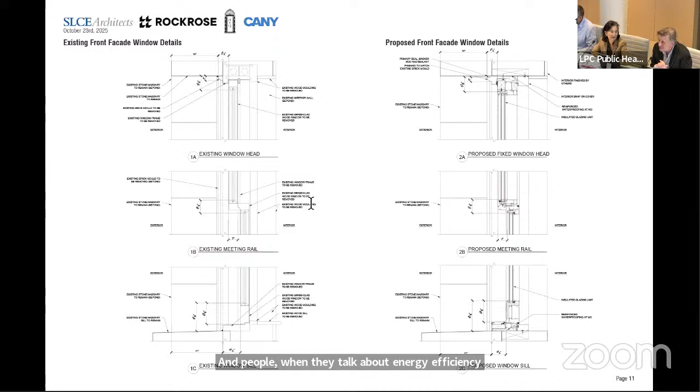Double hung windows by their very nature leak a lot. And people, when they talk about energy efficiency, often talk about insulator value, but as important is our air changes within a building, because every time the air changes through a building, in the winter you have to heat it, in the summer you have to cool it. So I think, given the competing issues, what the applicant is proposing and what we've accepted in the past of a difference in operation is appropriate, because climate change and carbon footprint are, I think, existential issues, and we really need to, in part to preserve our historic buildings, try to limit the carbon footprint of our buildings. Thank you. Does anybody feel any differently?

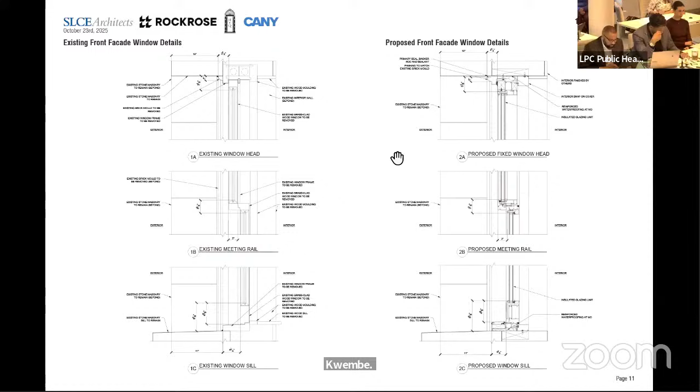That's been approved. Now for the next item. Next item is public hearing item number 3, LPC 25-11473, an application for a certificate of appropriateness in the Borough of Brooklyn, Block 1159, Lot 39, 302 Prospect Place, in the Prospect Heights Historic District. This is a Romanesque Revival-style row house with Renaissance Revival-style elements designed by Dahlander and Hedman and built circa 1896. The application is to construct rooftop and rear yard additions.

Hi, I am Rustam Mehta from GRT Architects in Brooklyn, presenting work on 302 Prospect Place. This is a building towards the edge of the Prospect Heights Historic District. It's a 2-story plus basement building. The work we're proposing is a rooftop and rear addition. There's no other work to any of the existing portions of the building.

These are photos from the street. Worth noting in the plot map, which I'll mention when we look at the photos of the rear yard, is that it's in a bit of a valley in the interior of the block, with number 300 being quite deep and number 304 being quite deep. We have unconditional letters of support from number 304 and number 300, which I'm happy to read, and I'll point out some changes we made after presenting twice to the local community board.

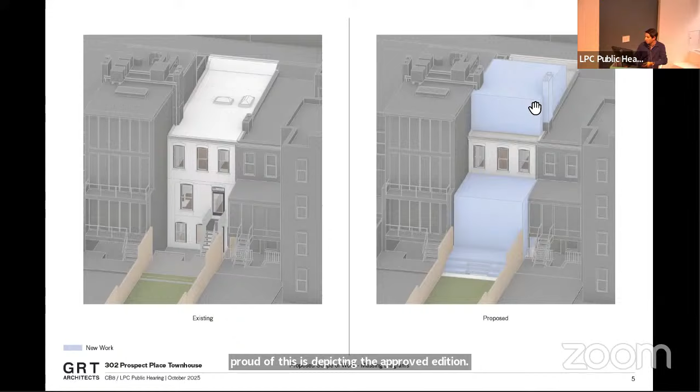We lowered the rooftop addition after meeting with the community board, and I'll explain that in more detail. We were asked to be as succinct as possible, so I won't speak to these sightline diagrams, besides to point out that the only visibility is the FDNY-required rooftop ladder, whose 42-inch extension handrail is the only portion that's visible.

We had originally tried, in the name of not demolishing the existing roof and for cost efficiency, to leave the existing roof and keep the addition higher. After meeting with the community board, we brought the addition as low as it can possibly be, so it's in the plane of the existing ceiling. We have a code minimum ceiling, and we've chamfered the street face. All of that has resulted in no visibility from the street besides the ladder I mentioned.

We've also stepped back from the rear facade. There are a reasonable number of rear additions, and a handful of rooftop additions that are approved, which we'll show you. I can go into this in more detail if requested, but I'll go relatively quickly through our slides.

Number 256 was approved by Landmarks and is constructed. I believe it's possibly more impactful than what we're doing, having an occupiable roof deck on 2 levels on the rear—we have no occupiable roof decks on the rear. I believe the expression of glass is more contemporary and more obvious on that structure, which has got stucco cladding on all levels.

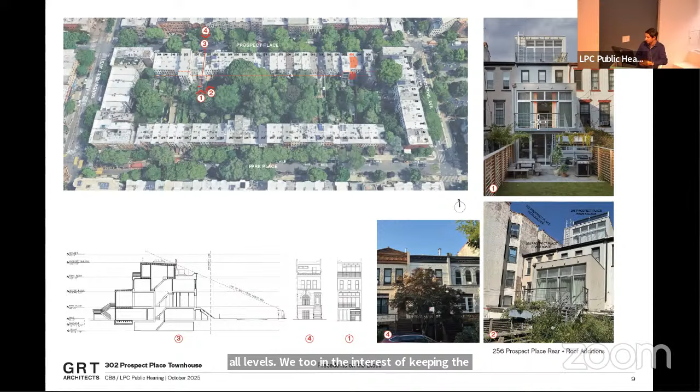We too, in the interest of keeping the addition relatively quiet for a small building, have used similar cladding on all 3 levels. We've documented no visibility through the only break in the street.

As I mentioned, we kept this as small as possible. This is a house for a growing family—they needed a space for hosting events, so we made what I think is probably the smallest dining room addition we could, which again is less deep than zoning would have allowed. There's no other change to the interior of the building besides where it's opened up to this rear yard addition.

It's not an occupiable low roof, just the DOB-required sustainable roof. The top level is a bedroom suite.

Again, I believe we kept things a reasonably small size. We've stepped back from the rear facade. There is an occupiable roof deck here, but it is not visible. We kept glazing to a minimum.

This is north facing. It wasn't really required, so we just have a glazed swinging door as the only glazing facing the street side. The existing building is painted brick.

We're proposing the addition in similar but not identical painted brick. I believe the simple detailing and fenestration makes it clear this is an addition. Because of the intense contemporary building on one side and the precedent on the block, we did not want to change materials that felt too loud or dissonant for a building of this size. We thought the fenestration and using painted brick again was the most harmonious path.

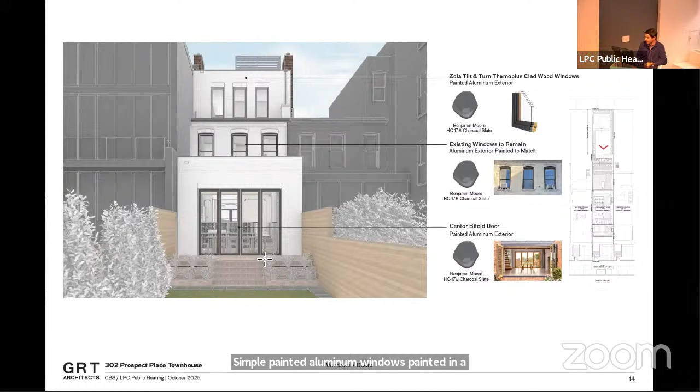But we don't have a cornice, we don't have elaborate or arched lintels, and I think the mode of fenestration is clearly contemporary. Simple painted aluminum windows, painted in a similar charcoal color to the existing windows, to which there is no work.

An elevation from the rear. This is a rendered elevation facing the street. As I mentioned, we've chamfered the roof, that's in standing seam. Again, painted brick on the facade, a minimum of glazing, and the hoop of the ladder is the only thing visible, which you'll see in our mock-up.

We have mechanical equipment that is screened to meet the zoning resolution, which is not visible. We have a stucco finish on the party wall. We've coordinated access, or are working on access agreements with both neighbors, which will be in place before construction starts. As I mentioned, we have unconditional letters of support from both neighbors.

Photos of the existing roof. Photos of the mock-up. So the mock-up was built at the height we had originally wanted to build, which would be on top of the roof.

After the community board meeting, we modified the mock-up with tape to indicate where it would be sunk in, both because we chamfered the roof—you can see the angle here—and because we sunk the entire addition down into the plane of the existing roof.

And then we photographed that, documenting it. So these are augmented photos pointing out where the tape is. But this mock-up is in place and able to be viewed.

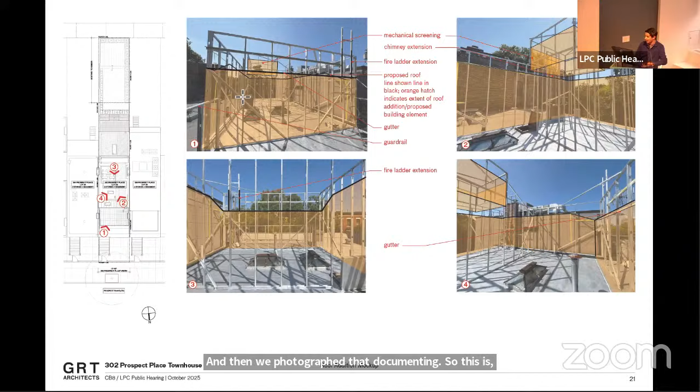We photographed it, and the only visibility we found—there's a significant slope to Prospect Place. Technically speaking, I think you're just outside of the actual historic district where the visibility is from. It is only the rungs of the ladder.

So to point out again here, the studs you see are from the old mock-up. You cannot see the new mock-up, which is in red tape. We highlighted in red those two rungs of the ladder, just painted charcoal, which are the only visibility.

And there is no visibility because as the street goes to the west, it goes significantly downhill. So it is only across the street at this intersection that you get that. Any other portion of the street is nothing, and there's only the ladder rungs from that one standpoint.

This is kind of a rendered version of that, so it's barely visible, which I believe is true to life. You can just see the hoop of the ladder rungs.

We noted other instances where ancillary rooftop elements are visible. There is some ductwork visible on number 300. This is a map where other such add-ons, such as roof vents, satellite dishes, and the like, are visible. I believe all of these are significantly more impactful than the 1.25 inch pipe rail of the FDNY required ladder.

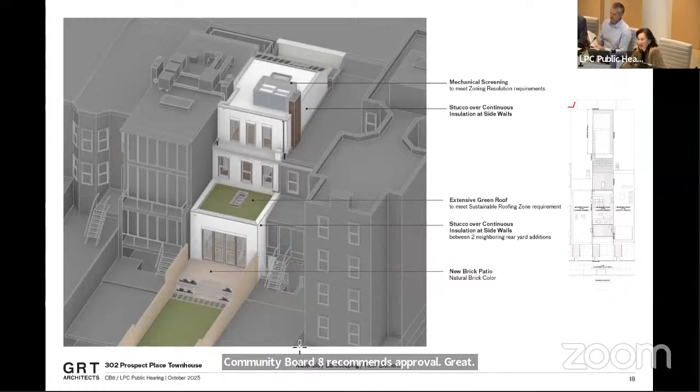Okay, so let's go ahead and close the hearing. Commissioner Wilder, would you make a motion to close the hearing? So move. Commissioner Ikwembe, would you second that? Second. All in favor, say aye. Aye. Any opposed? Okay, the hearing is closed.

Commissioner Mahan, would you like to start this discussion? Sure. Thank you for the very thorough and careful presentation, and thank you for all the effort that you've gone to make this appropriate, to reduce its visibility, to distinguish it from the existing building. I thought that it was quite carefully handled, and I can find it appropriate. There's, for all intents and purposes, no visibility whatsoever.

The original massing is still recognizable. The additions are modest given the context, immediate and even a bit further afield. The existing color is white, so you're keeping it white. I might note I did see the specific color called out. Not all whites are created equal. I'm an architect too, I've used that one. It's very, very bright, so you might think about that a little bit for yourself. I think that's the color I use for the ceiling when I want it to be as bright as humanly possible.

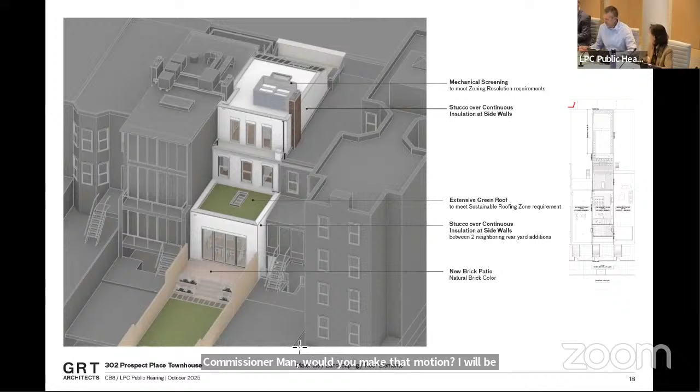In the matter of LPC 25-11473, 302 Prospect Place, Prospect Heights Historic District, a Romanesque Revival style row house with Renaissance Revival style elements designed by Dollander and Hedman and built circa 1896. Application is to construct rooftop and rear yard additions.

I recommend approval, finding that the proposed work will not damage or eliminate any significant architectural features, that the proposed rooftop addition will be set back from the primary and rear elevations, thereby maintaining a sense of the building's historic volume, that only the latter extension at the rooftop addition will be visible from a public thoroughfare and will be seen in the context of neighboring rooftop mechanical equipment, and therefore will not draw undue attention to itself, that other rear yard and rooftop additions of this scale exist on buildings in the block, and the rear yard addition will align with the depth of the existing neighboring addition and will not further diminish the central green space.

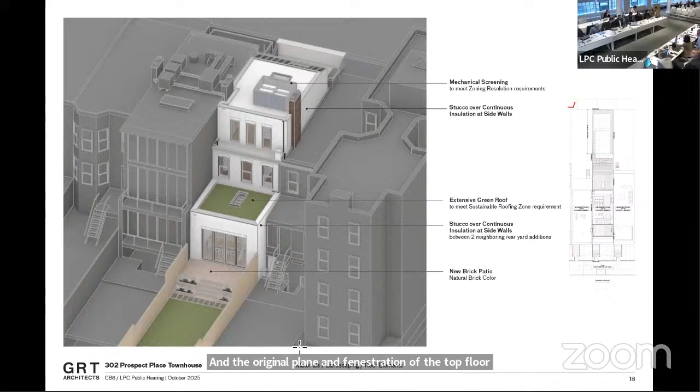That the proposed rear addition will not extend the full height of the facade, and the original plane and fenestration of the top floor will be retained, thereby maintaining the house's historic relationship with other buildings in the row. That the contemporary design of the additions featuring white thin brick and stucco cladding and punched openings with black single light doors will be harmonious with the residential character of the building and the surrounding context, and that the cumulative effect of the added volume of the rear addition combined with the proposed rooftop addition will not overwhelm the building or detract from the adjacent buildings. And finally, that the applicant work with staff on final selection of the particular white paint color.

Thank you. Commissioner Ginsburg, would you second that? Second. Thank you, and Mark, will you call the vote? Vice Chair Master, aye. Commissioner Chu, Commissioner Ginsburg, aye. Commissioner Goldblum, Commissioner Ikwembe, Commissioner Jefferson, aye. Commissioner Mahan, aye. Commissioner Wilder, aye. 8 in favor and none opposed. The motion passes, okay, that's been approved.